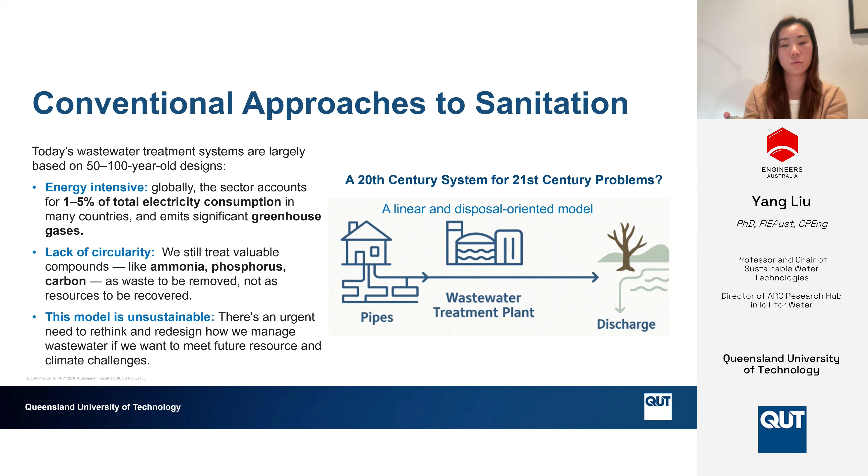I will now pass it over to David. Thank you, Yang, and welcome everyone, and thank you for the opportunity.

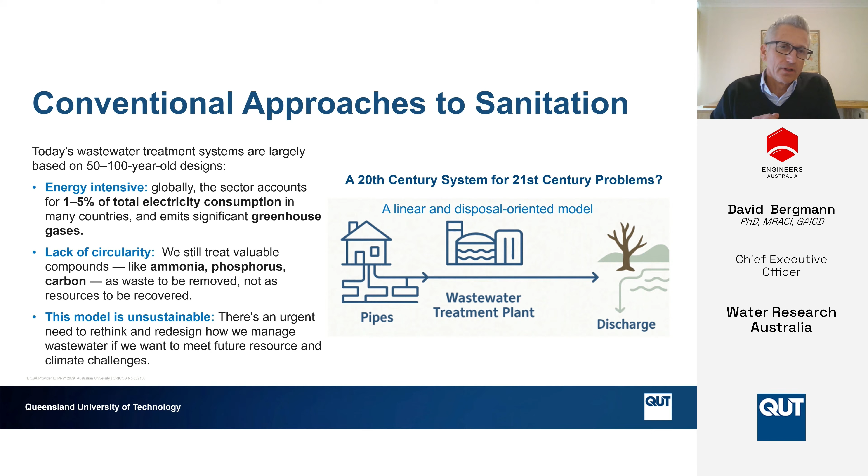In understanding really where we need to go in terms of developing sustainable water futures and systems, it's important we take the opportunity to just zoom out a little bit and look at some of the key drivers and trends happening in the water industry. And potentially those listening in might see these as being pretty common to their industries as well if they're outside the water sector. So there's really three key trends, and we could debate if there's more as well, or whether these are exactly the right ones.

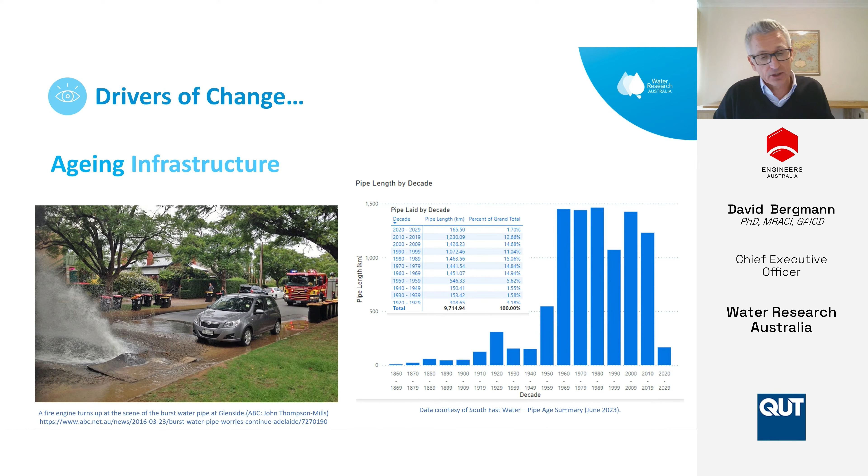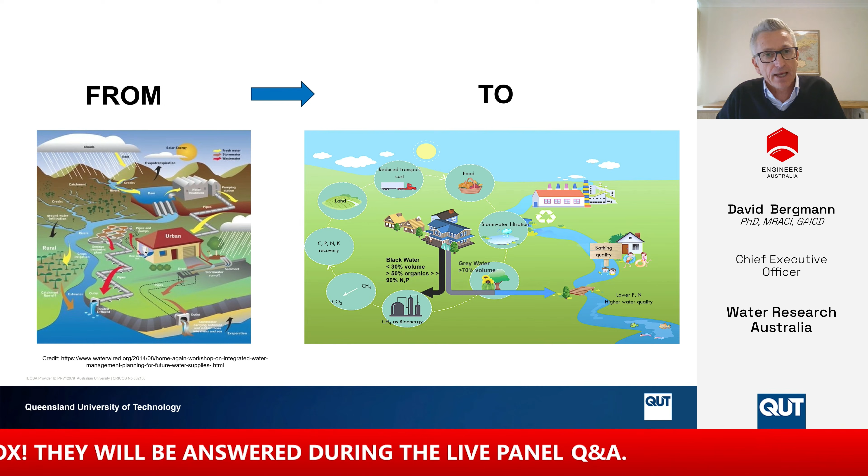So part of what we're presenting today is how a water utility needs to shift from this quite linear progression—from catchment through to pipes and pumps, distribution, treatment, and ultimately outfall, a very linear sequence—to one that is much more sustainable, one that is more circular, one that taps into and recovers resources, one that is more energy efficient, lower emissions, and just more adaptive and resilient to the community, the environment, and the climate we are in. And we'll progressively unpack that.

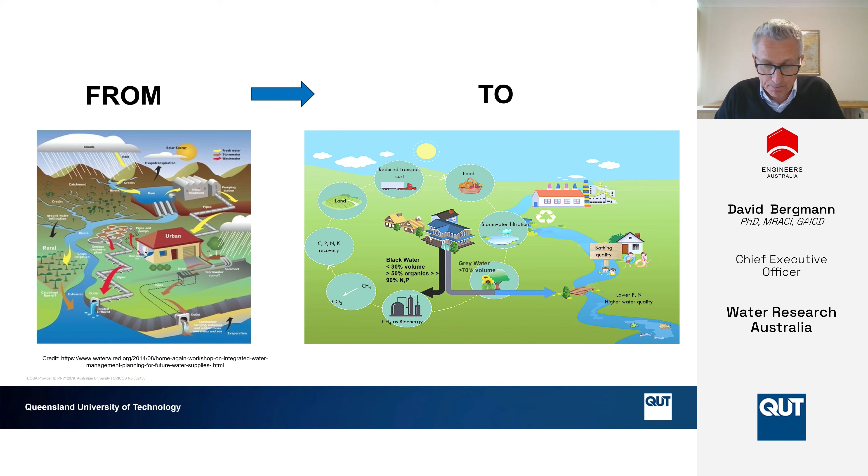What does the future water utility, a sustainable water utility, look like? And this is where I pass back to you, Yang.

There are many ways to think about sustainable wastewater management. So David and I have summarized our journey towards sustainability into three key elements that we believe are essential. The first is around low carbon—focusing on cutting emissions and designing systems that use less energy and even produce energy. The second is around circularity.

That's when we start to shift how we think about wastewater, looking at how we can recover useful resources like water, nutrients, materials, and energy from wastewater. The third element is around making our system more adaptive—building systems that can handle climate impacts and meet the needs of different communities. So we'll follow these three elements to guide our discussion on what rethinking wastewater management could look like for our water industry.

Because we'll be talking about how we might improve our current wastewater treatment systems, we thought it would be helpful to first give a quick overview of our conventional sewage treatment systems.

So basically, we have 4 key processes. The treatment starts with solid removal in primary settling, followed by the activated sludge process as the second step, where microorganisms use oxygen for organics and nutrient removal. Then we have secondary settling for removal of remaining solids. The sludge can then be managed in the 4th step with a process like anaerobic digestion, where we can recover some energy. But not all wastewater treatment plants have an anaerobic digestion process.

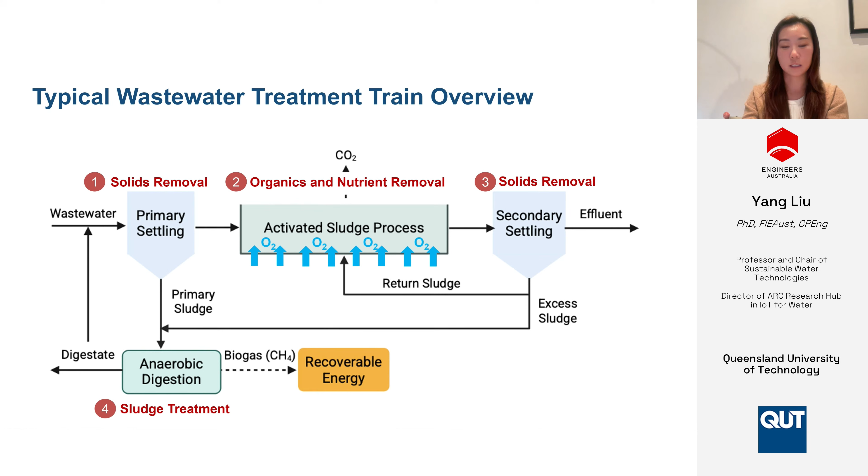So we'll start with the first pillar. Back to you, David.

As we take our transition down the journey to be a sustainable water system in a low carbon future, let's look first at the emissions coming from our wastewater system. It's important we look at those scope 1 emissions first, those we can hopefully monitor, control and mitigate as part of a wastewater treatment process. Those emissions can be significant. It's important that we have good monitoring in place, that we understand the emission hot spots from treatment processes, and then put those strategies in place.

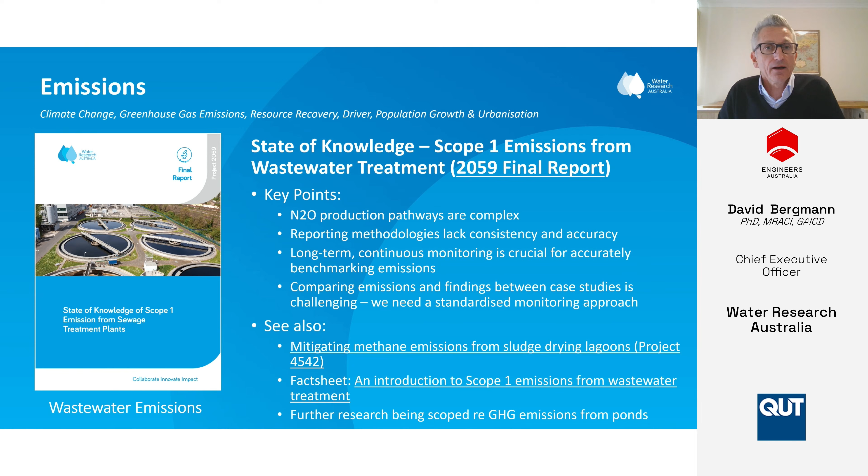For example, nitrous oxide emissions are significant and are often underreported or underrepresented within emissions factors or emissions modelling. There's research emerging in this space. Nitrous oxide is a greenhouse gas 300 times more potent than traditional greenhouse gases, and is of concern, something we need to be monitoring and tracking carefully, which leads to a particular global project that is underway.

Wastewater emissions from treatment plants are a global issue, found across the globe. So there's a global project focusing on making sure we monitor nitrous oxide emissions across the plant, so we know exactly where those emissions have come from. We establish best practice in this space so we're able to compare, share, and build knowledge. Ultimately, the mitigation actions we put in place are going to make a difference and help us meet our climate change and net zero goals.

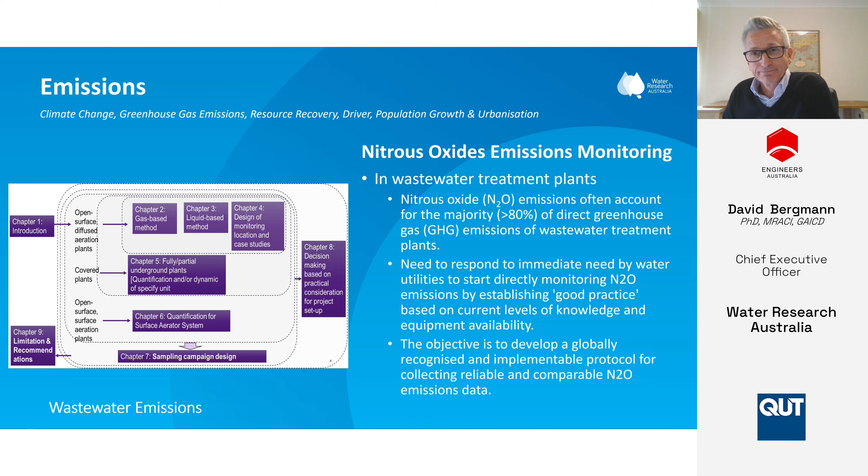However, organics are also a potential energy source, and we can actually design our system to capture them. But in terms of ammonia, currently there are still challenges to directly recover ammonia from mainstream wastewater. So we should really consider how we can reduce energy demand for ammonia removal.

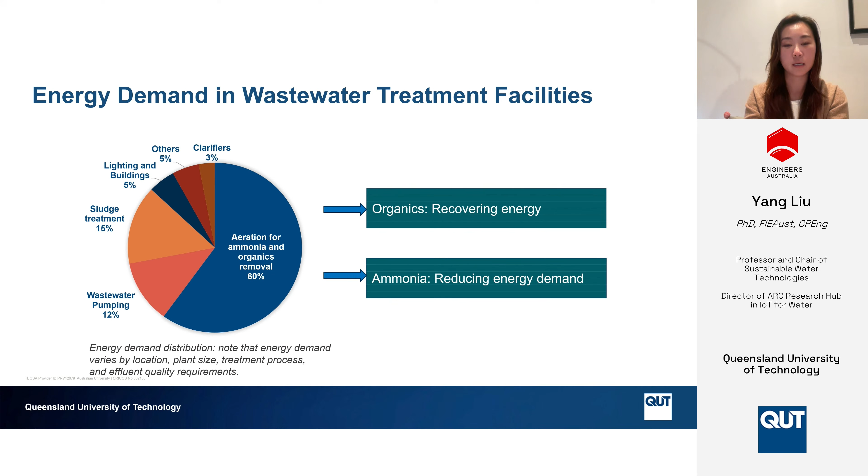At the sewage treatment plant, ammonia is normally removed through a process called nitrification-denitrification. This process begins with ammonia being oxidized to nitrite and then to nitrate, and in the final stage, nitrate is converted to nitrogen gas. This process involves three main groups of microorganisms: ammonia oxidizing bacteria (AOB), nitrite oxidizing bacteria (NOB), and denitrifying bacteria that carry out the rest of the reduction reaction.

Normally, NOB would outgrow AOB, and therefore, as soon as step one, ammonia oxidation, is carried out, nitrite can then be quickly converted to nitrate. The first step consumes around 75% of the total oxygen demand, and the second step consumes about 25% of oxygen. The nitrate reduction process does not require oxygen.

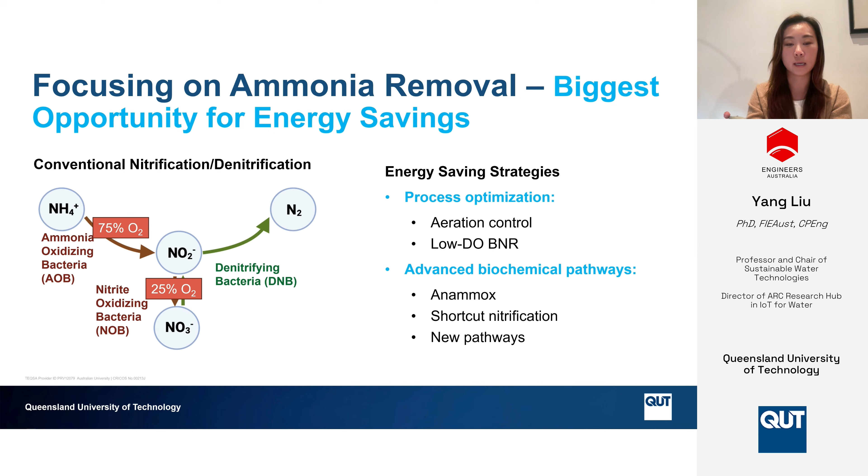So there are two key opportunities for us to consider to reduce energy consumption for ammonia removal. One is the direct optimization of the treatment process, and the second is around manipulating the reactor microbiome community and developing a more energy efficient biodegradation pathway for ammonia removal.

As an example, started in 2010, we conducted a 3-year study at a full-scale sewage treatment plant. Our objective was to explore how we can optimize the treatment process and save aeration energy. We conducted sampling at 9 locations throughout the biological treatment process, following the flow path: first anoxic tank, anaerobic tank, second anoxic tank, and then 3 aerobic tanks. We sampled at the beginning and end of each tank, and monitored the removal of COD, ammonia, phosphorus, metal, and other pollutants, as well as the microbial community dynamics across different seasonal and flow conditions.

We observed, for instance, during low flow or summer conditions, COD and ammonia can both be fully removed after the first aeration zone. This indicates that under these conditions, we can reduce aeration in the aeration tank. So in our study, we largely focused on when and where aeration can be safely reduced without compromising microbial activities, stability, and treatment performance.

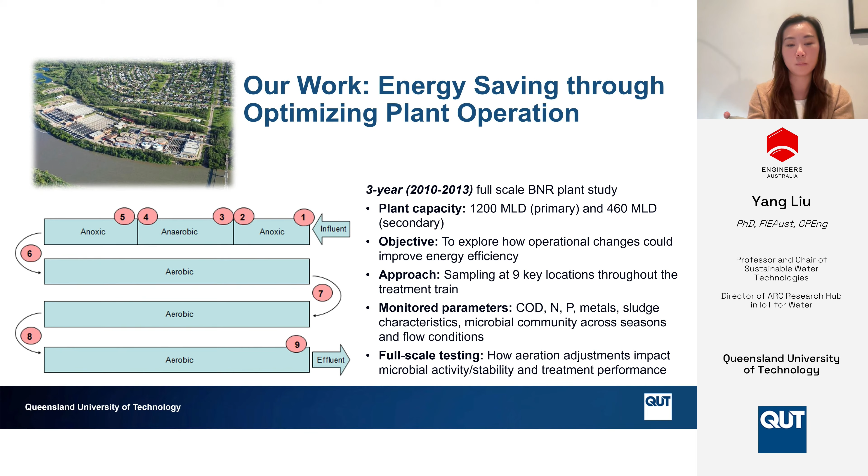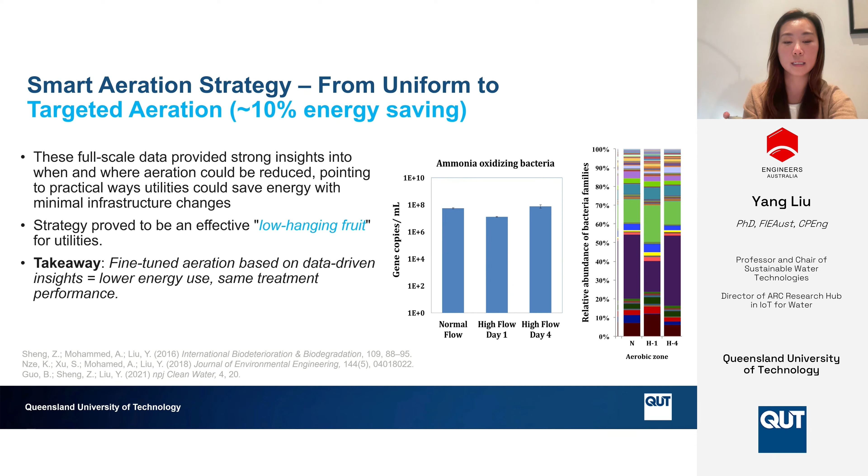So with this study, we were able to develop this targeted aeration strategy, which has led to an average energy saving of around 10%. And this is exactly the type of low-hanging fruit we should be looking for.

But if we want to further improve the energy efficiency for ammonia removal, we'll need to rethink the microbiology itself. If we look at the conventional nitrification-denitrification process for ammonia removal, what if we can inhibit the growth of NOB, the nitrite oxidizing bacteria? That means nitrite produced by AOB in the first step can be directly utilized by denitrifiers and converted to nitrogen gas. This process is called shortcut nitrification, and it can save up to 25% of oxygen demand.

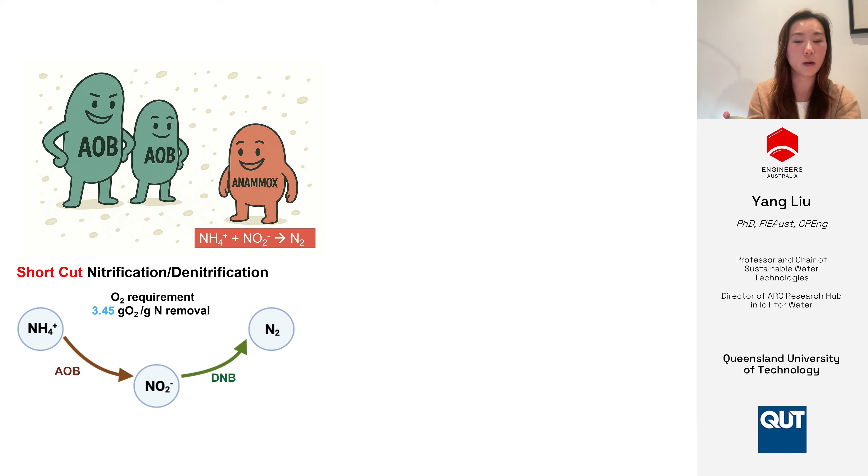Now, if we can introduce a new group of microorganisms called anammox bacteria, which are capable of converting ammonia and nitrite directly into nitrogen gas without oxygen, we can save even more energy. This process is called partial nitrification and anammox, or PNA.

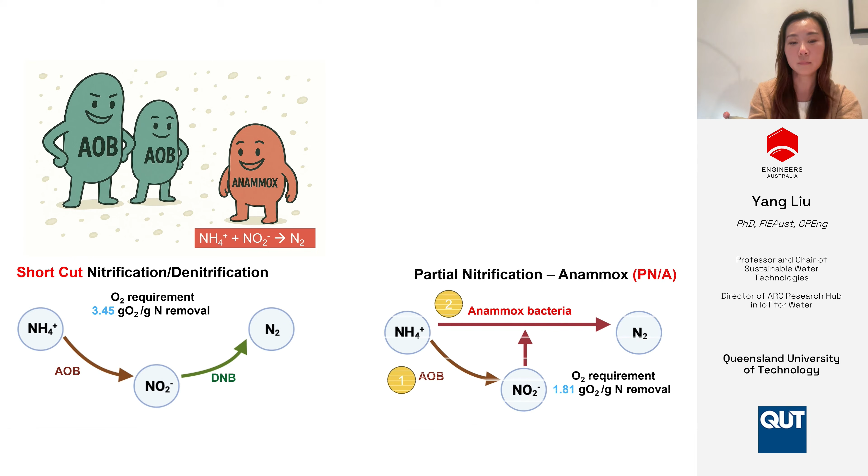In this pathway, about half of ammonia is first oxidized to nitrite using oxygen, and then the rest of the ammonia is removed with nitrite by anammox bacteria. A variation of this process is called PDA, which can achieve a similar outcome. Overall, with PNA and PDA processes, we can achieve about 50 to 60% reduction in oxygen demand.

Therefore, by selecting and encouraging the right microbial consortia, especially AOB and anammox bacteria, in the reactor, we can significantly reduce aeration energy. But the question is how we can actually achieve that.

For instance, in their growth strategy, AOB like more dynamic and changing environments, while NOB prefer more stable conditions. Their oxygen requirements, stress tolerance, preferred pH range, and sensitivity to inhibitors like free ammonia are all very different. This type of difference gives us an ecological lever we can use to select the target microbial community.

The next step is, of course, to apply this knowledge in practice. This slide shows some of the bioreactors we operate in our water innovation lab at QUT. We call it the WISE Lab.

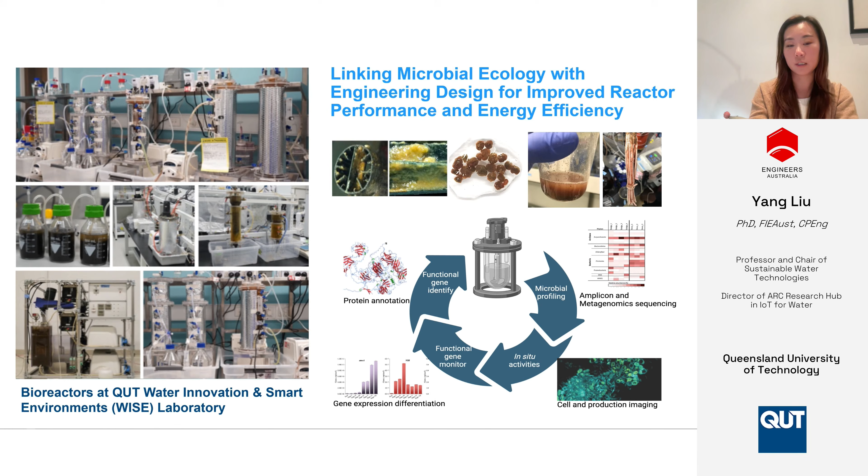In order to select the desired microbial consortia, we often run multiple bioreactors in parallel, each with slightly different conditions like dissolved oxygen levels, aeration cycle, or feeding strategies. Then we compare the microbial community and their activities that develop in each system. The goal is to link microbial behavior and ecology to engineering design and control strategies. This approach can help us develop more targeted, energy efficient, and robust treatment solutions.

One process we developed in our lab is called the granular sludge reactor, or GSR technology. This is based on the shortcut nitrification process. The GSR process is designed to treat high ammonia wastewater and can achieve up to 5 times higher nitrogen loading capacity compared to conventional systems.

We have already demonstrated this process for the treatment of a range of high ammonia wastewater types, including centrate, landfill leachate wastewaters, and other industry wastewaters.

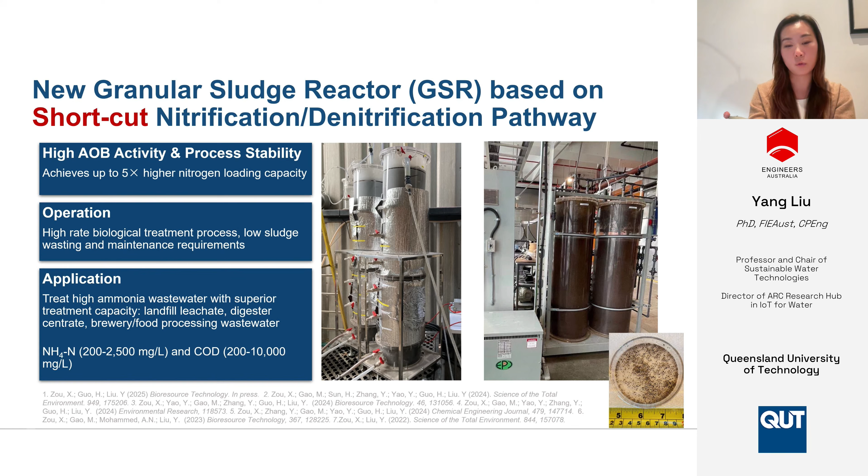In our lab, we've also been working on other nitrogen removal pathways. One process I'm showing here is called Sulfammox, which is sulfate-dependent ammonia oxidation. This pathway directly couples the oxidation of ammonia with sulfate reduction, producing nitrogen gas. Sulfammox also often coexists with other processes like anaerobic heterotrophic sulfate reduction and sulfur-based autotrophic denitrification.

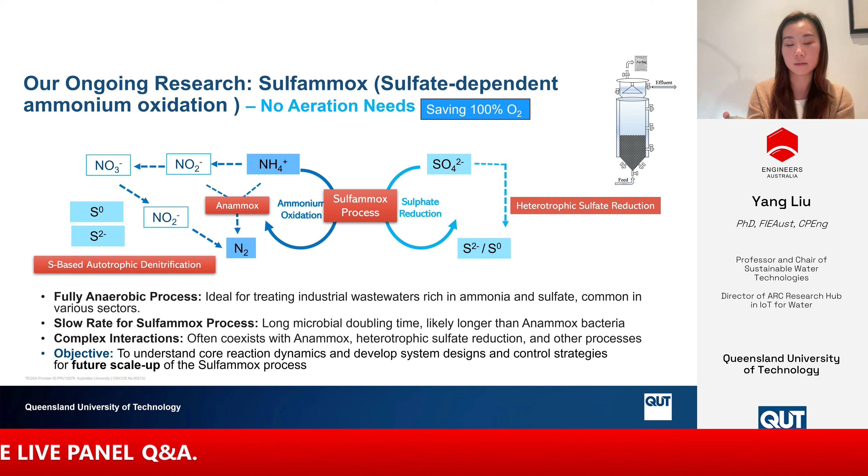This process doesn't really require any energy, so we're saving about 100% of oxygen. But the major challenge is that these are very slow-growing microorganisms, and the reaction is very slow. So in my lab, our focus has been on optimizing the system, with the ultimate goal of scaling up this process for practical use.

So now I would hand over to David to continue the discussion on resource recovery.

Thank you, Yang. As we continue our journey towards a sustainable wastewater future, the second element we've outlined is for the water sector, water utilities, to be more circular in their approach, particularly focusing on resource recovery. There are 4 elements to that we'll move through here.

As it applies to wastewater, what can be recovered? There are nutrients to be had, there are other materials to be recovered, there's the water itself, obviously, to be taken, and then there's the energy, and we'll move through those. The first 2 I will focus on next will be around the nutrients to recover and also the carbon side of it, or other material elements to it.

A water utility or wastewater system needs to move away from thinking of itself as a linear operation, wastewater in, treated product out for disposal. It needs to see itself participating in a circular economy, almost like layers of an onion. It can be a small circular economy focused on part of a plant, or the whole plant, or even one outside its boundaries, associated with the industry around us.

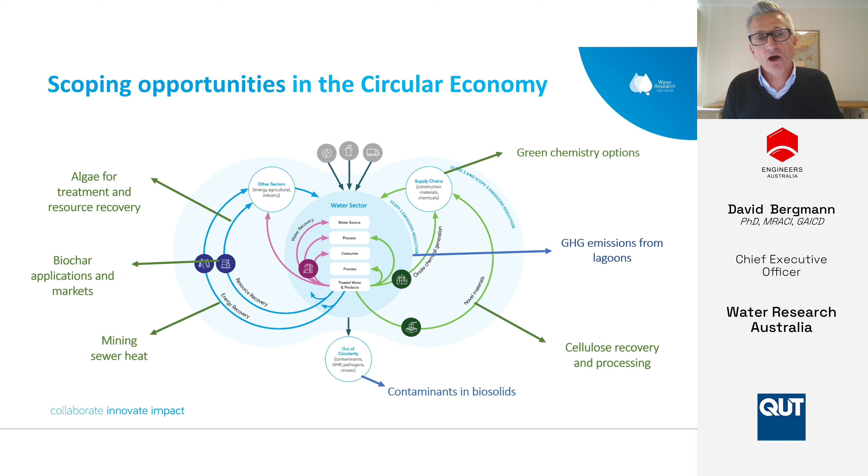We'll unpack a few of these, particularly around what green chemistry transformations are possible for the resources recovered. We'll touch on cellulose recovery and its transformations and possibilities. We'll talk about the sludge or biosolids collected at the end of a wastewater process and the kind of carbon products that can be used. We'll also briefly touch on algae and some other options.

Here's another possible configuration of a wastewater treatment plant, slightly more complicated than the one shown earlier, but there are ways we need to look and break down the process. What can be recovered at the beginning of a wastewater process? For example, there's emerging technology showing that cellulose is recoverable from wastewater treatment, predominantly from the toilet paper used in our sewage system.

Also focusing on that digester stage, there are materials that can be produced that feed and create proteins that could end up as possible feedstocks, volatile fatty acids that could be created to produce other chemicals and bioplastics, for example. Or we could optimize and harvest the biogas and biomethane coming from that, or focus on the carbon and the type of carbon products.

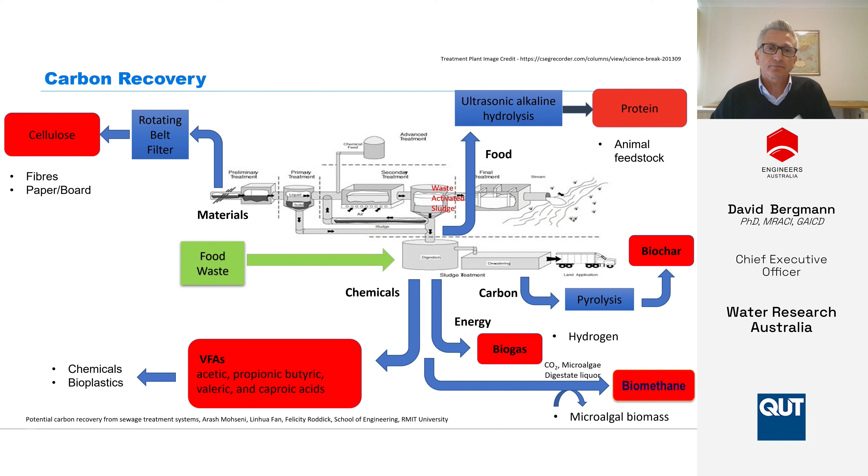Plus there's the opportunity to participate in that wider circular economy by looking at what other food wastes or organic wastes can be brought into a treatment process, to feed it effectively and create more value out of these pathways we're establishing here. So we'll look at a few more of these.

Firstly, that solid product that remains at the end of a treatment process, some call it sludge or biosolids at various levels of dryness. Traditionally, a wastewater operator may have arranged with agriculture or nearby farmlands to distribute it to land, and it has great carbon, nutrient, nitrogen, phosphorus value, and is very effective.

These days, with the number of emerging contaminants coming through in our wastewater systems, just think PFAS as one example, that's becoming an increasingly unviable option for sending to land. So the industry is really looking at thermal processes to convert these biosolids, rich in carbon, nitrogen, phosphorus and other things, into materials of value, carbon materials of value.

Pyrolysis is getting a lot of consideration at the moment in Australia and other parts of the world. That's the kind of thermal process, using different levels of temperature to favour a carbon type output at the end of the day.

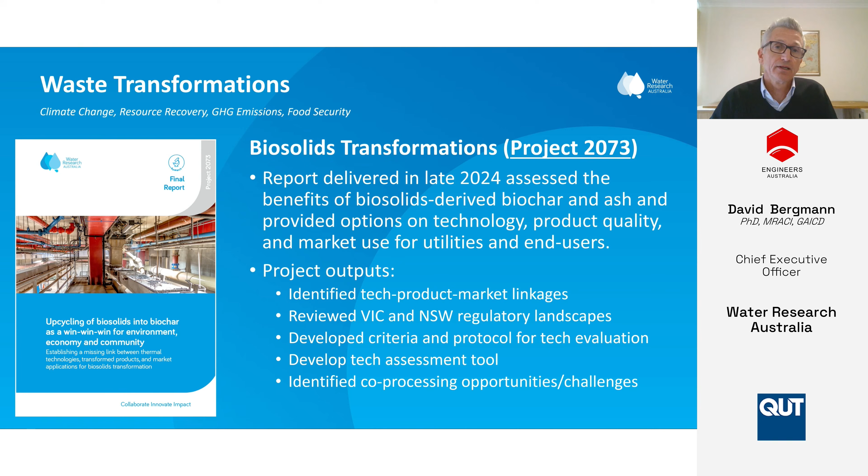Carbon is being used in a whole bunch of areas: batteries, electronics, purification, even water and air purification as well. I'll come back to some other pathways and possible products from these processes.

I just wanted to touch on the principles of green chemistry, particularly as I'll talk about cellulose in a second. Cellulose is an interesting feedstock that lends itself to these kinds of transformations to produce other chemicals, platform chemicals, bioplastics for example. It's been established for some time now, the 12 principles of green chemistry, of which I'm not going to go through all of them.

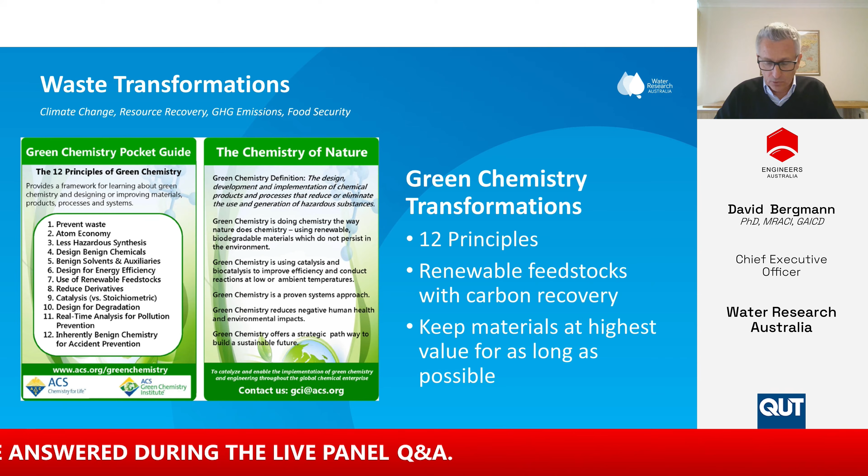But the water sector has a great opportunity to design and really consider what they do, in particular taking the endless source of carbon feedstocks coming through the wastewater system, and other elements as well that are possible there, and taking the opportunity to, rather than just destroy or dispose, actually try to keep some of these materials at their highest possible value and convert them into other materials of value, and really look at the way green chemistry can help in those processes.

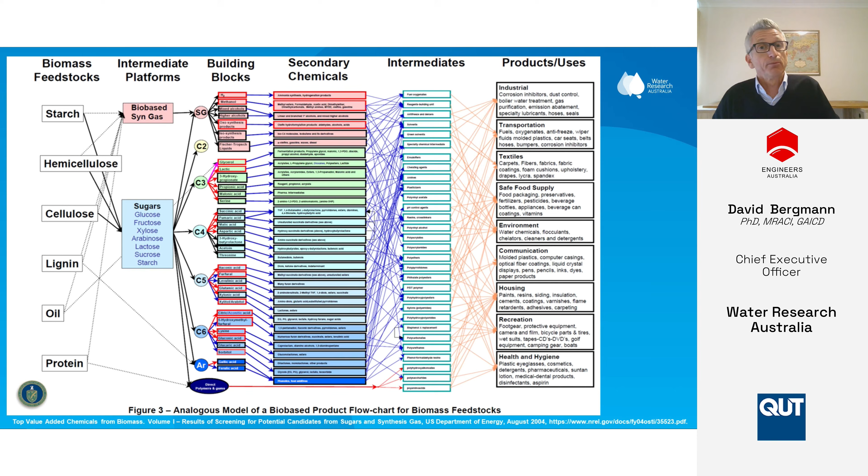There's been a lot of thinking done on this already, we don't need to reinvent the wheel here. So if we're able to isolate, for example, cellulose or other materials out of our wastewater systems, there's an enormous number of possible pathways to convert these materials into other materials of value, reducing our reliance on non-renewable or petroleum-based feedstocks, and actually replace those for a much more sustainable future.

So let me briefly touch on cellulose. The technology is emerging for us to recover cellulose from the front of wastewater treatment plants. That cellulose can either be used directly in other products, so roadways or other construction, for example, or even derivatized in other packaging materials to produce much more sustainable packaging as an outcome.

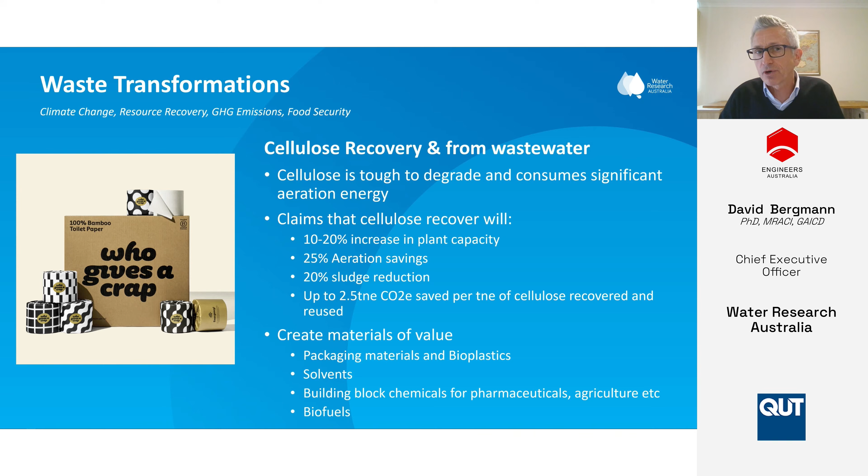Also, by removing that cellulose, there's research and reports emerging that it has the potential to increase capacity of our wastewater plants, reduce their energy demand and carbon emissions as a result, and lead to much more efficient processes, aeration savings, sludge reductions. So what do you do with that volume as well? It's an emerging field with much more research potential, and a lot more renewable or green chemistry outcomes possible.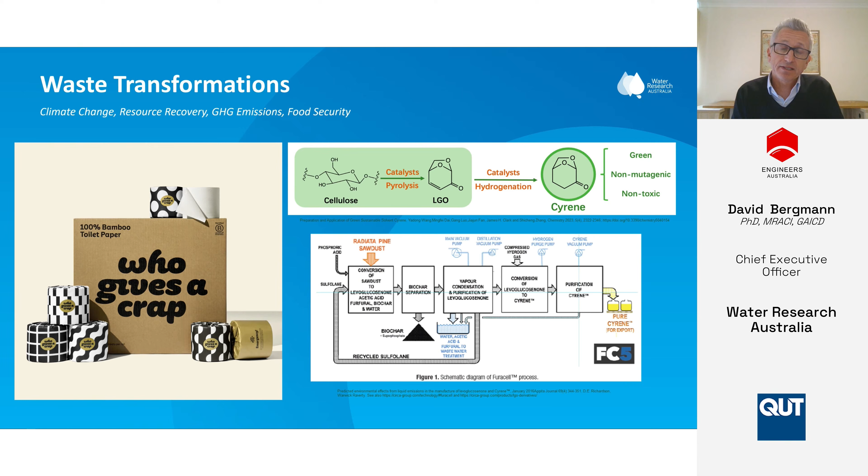I said I'd come back to other outcomes other than carbon, in terms of other thermal transformation processes to be applied to sludge or biosolids. In this case, it doesn't require the product to be dried as much, which is an energy saving in itself. By using pressure, lower temperatures are required, using supercritical properties of water under pressure to become an excellent solvent, and favour a process that is more towards biomethane, and also products that are low carbon with inorganic nutrients to potentially lead to pathways for agriculture.

So it just represents an alternative pathway from carbon to a carbon product like biochar, to biomethane and nutrients, depending on the context, the situation, or the economics of the particular water treatment plant and their pathway to a more sustainable future.

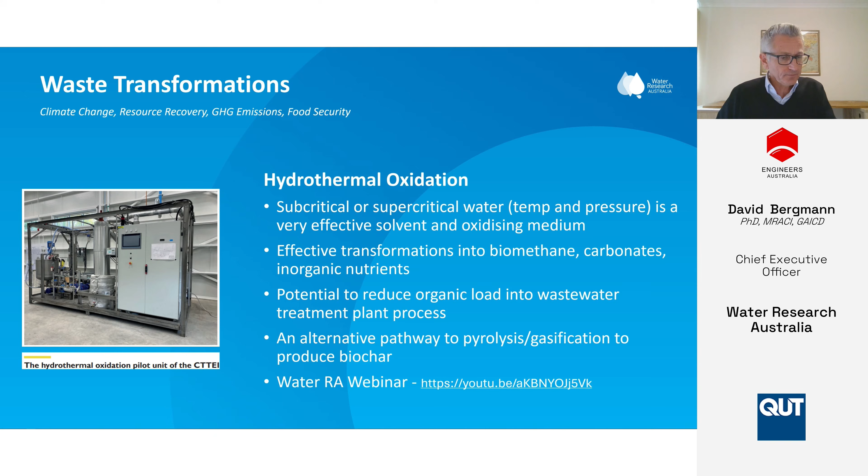Algae is also an emerging field, where algae, in particular macroalgae, is proving to have a number of benefits. Algae is great because it's a photosynthetic process - it's using natural energy from the sunlight, consuming CO2, producing oxygen, drawing down that CO2 and carbon to produce a biomass which can then be further transformed into other things. It's also taking up nutrients to produce a much cleaner water system, with opportunities for what can be done with those nutrients, the biomass, and other potential green chemistry transformations that are possible.

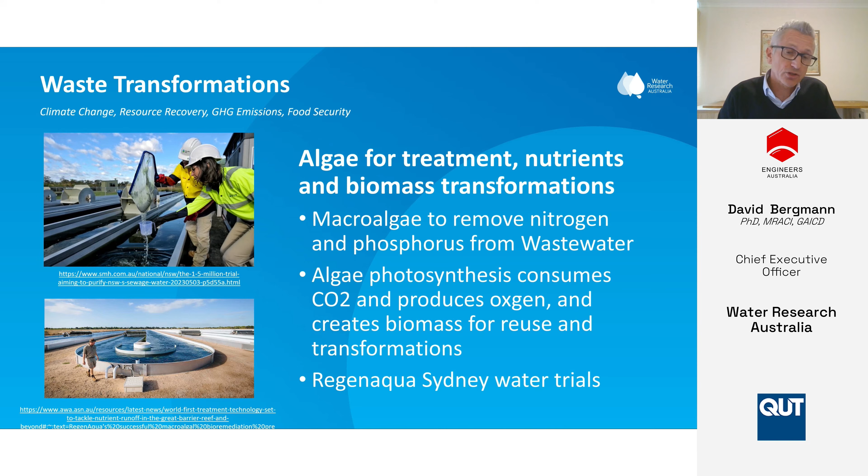Having said that, there are some warnings in some of these transformations to more sustainable solutions. We still need - and there is a lot of research going on, but more to be done - to understand the fate and outcomes of a lot of the contaminants that might be present. Thinking PFAS is one example, heavy metals, pharmaceuticals and cosmetics, making sure these are being dealt with properly, so that as we pass them on in the circular economy, we're not passing problems further into the food chain or the environment.

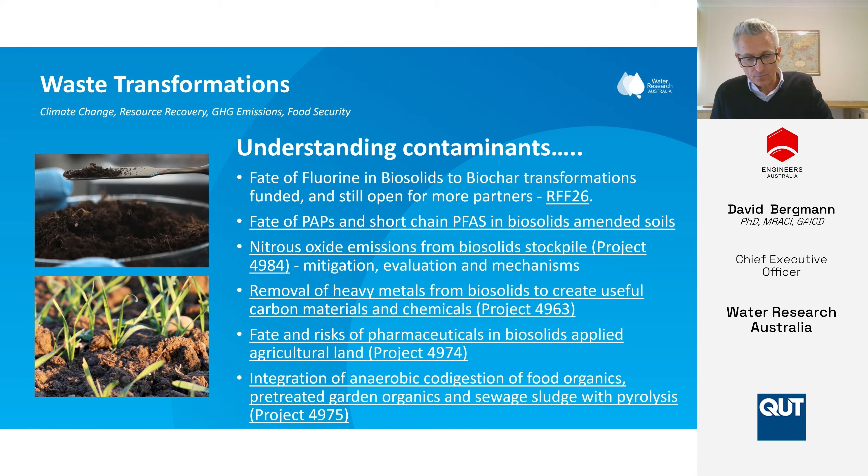Also, we should be considering the origins of the wastewater and our opportunities to actually recover nutrients and resources of value at the beginning of the process, not just be focused on our treatment plants and what can be done there. So here's an example of an innovation and technology being developed by UTS, Southeast Water, and other partners.

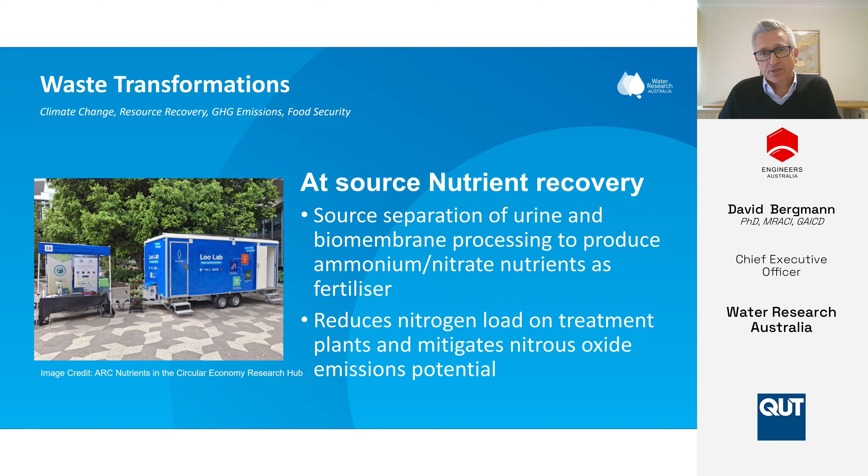We're using a urine diverting toilet. They have created a mobile public toilet, which they plan to use to test the technology and also test community and customer acceptance of this kind of circular economy, where the urine is taken using biomembrane technology and converted into a liquid fertilizer. As a result, there is less nitrogen entering the wastewater system and hitting our treatment plants, leading to less aeration needs, more efficient processes, and of course helping mitigate the potential for nitrous oxide emissions.

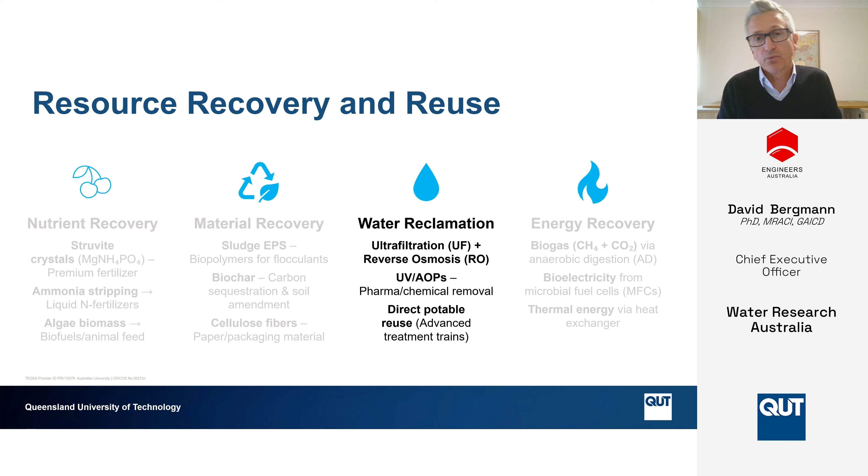So we'll keep moving on in our journey of resource recovery, and we're going to look at one of the more important parts and why we are here in many ways: looking at water reclamation and reuse. It's been a very focused topic, but it's very important that we look to save every last drop in our world of climate change, water scarcity, and water security.

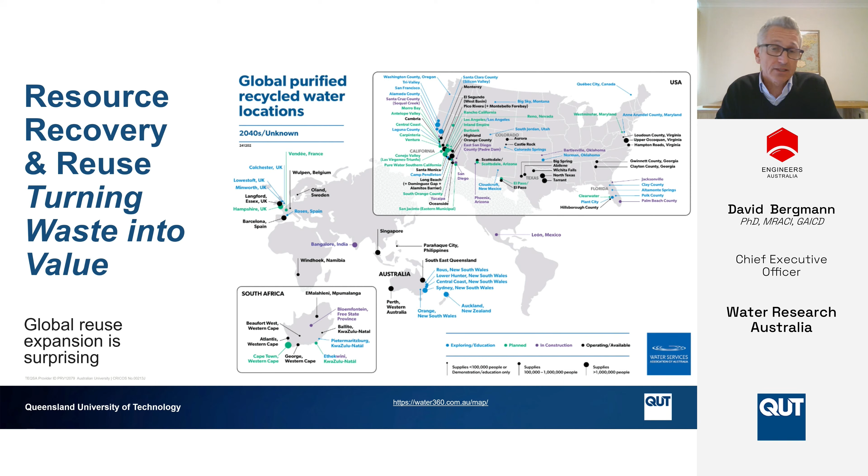So there's good reason for us to do it. In Australia, our sources of water are currently very rainfall dependent. We're surface water dependent, and by that we mean water that's in our catchments, in our lakes, and in our rivers. And of course, in times of drought and low rainfall, we are very susceptible to that, and it's also our most climate susceptible source of water.

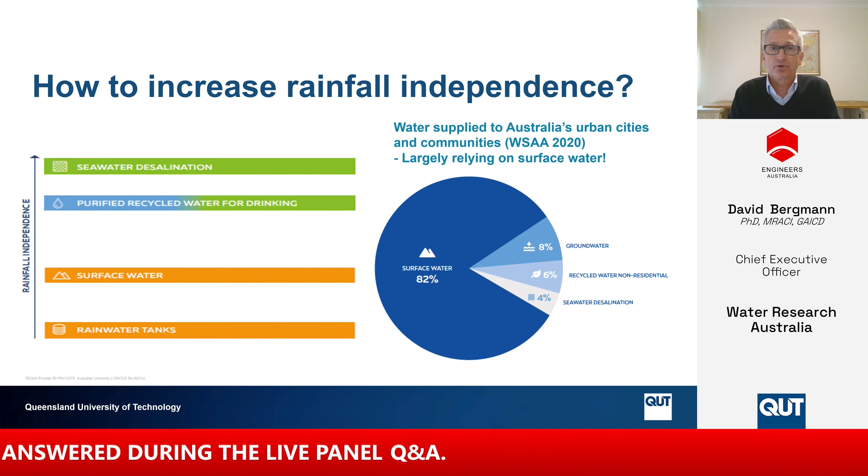So we really do need to be looking at all options of water that are possible for us, which is exactly the name of the title that WSAA put together: All Options on the Table, a report back in 2020. The numbers may have moved slightly since then, but I think the message is still there, that surface water, in terms of the yield or what's available to us, does have its limits.

Particularly in terms of dry years, climate impacted years, that can be a problem. So looking further at the other possible solutions, such as desalination to the far left, or recycled wastewater, these provide us much larger sources or yields of water as sources of supply for a much more secure and sustainable water supply in Australia.

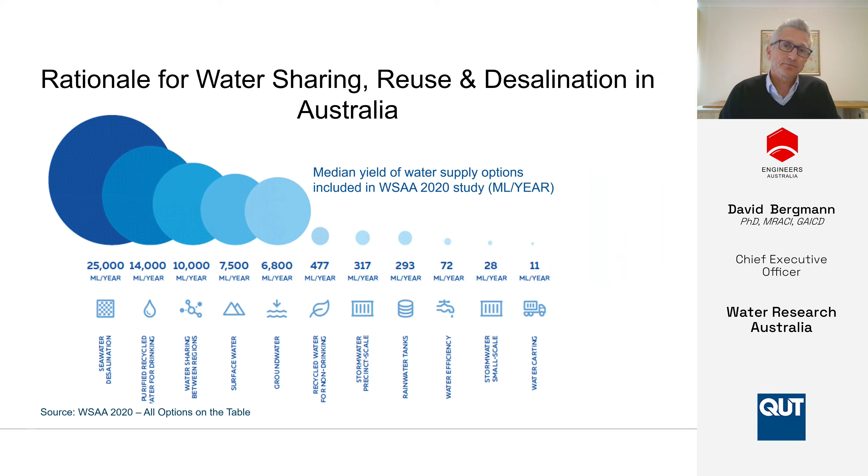As part of that report, they also looked at expected costs for those kinds of solutions. And yes, recycled water and desalinated water is more expensive than current practices. But in a climate changing world, in extreme events, in years of water scarcity, you begin to bring in some of those costs on the far right-hand side of things if we haven't planned in advance, around how we use our recycled water, how we're recovering water from our wastewater and using desalination to keep our water supplies high, then suddenly we find ourselves in a very costly scenario.

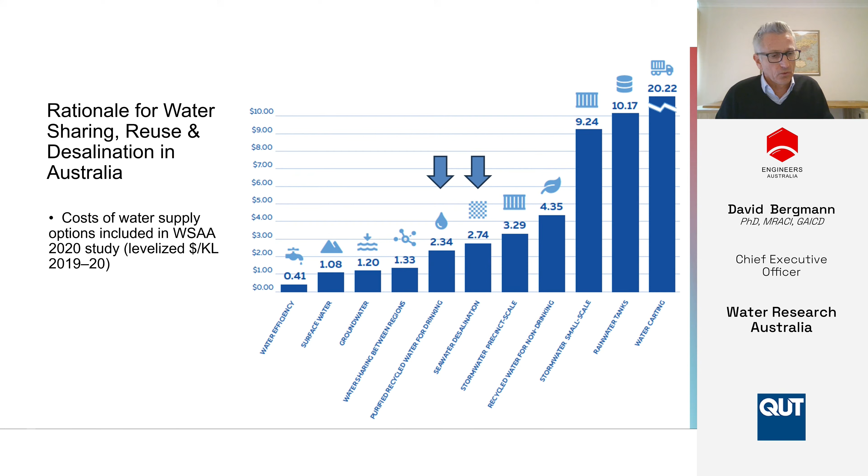So the time is right now that we are adopting these wastewater recovery practices, water reuse and reclamation, now to secure our supplies and be a much more sustainable water system and water utilities.

A couple of things to support that are going on in the industry and are needed in this space. In order to recover wastewater and reuse it, it's important - and it's surprising this doesn't exist - there are no standard protocols for validating the treatment plants and treatment processes associated with this. So we are working together with global partners to establish these standardized treatment protocols so that water treatment operators can claim all the possible log reductions and chemical contaminant removal steps that are possible. That leads to more efficient operations that are cheaper to run, cheaper to design, cheaper to build, saving significant costs and meaning much more efficient operations by having validated treatment processes.

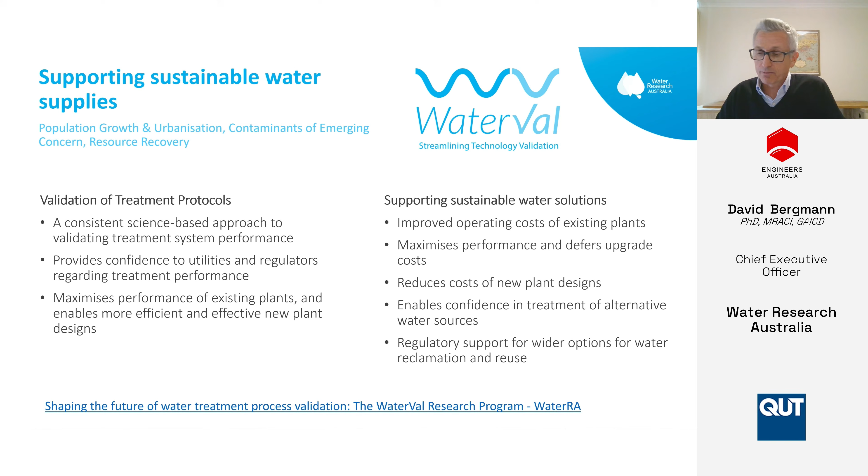Also, to building our resilience to drought, by using highly treated recycled water to keep our catchments and our dams at very high levels. If we look back at learnings and research from the Millennium Drought, environmental flows were cut to make sure that our cities had enough water in them, which in the hierarchy of needs was important. But I think there's a learning there that our environment was permanently damaged in some places as a result of that.

The rainfall runoff relationships that existed pre-millennium drought no longer exist. So it's important that next time we experience these times of extreme water deficiencies, we are able to look after the environment as well and be more sustainable long-term.

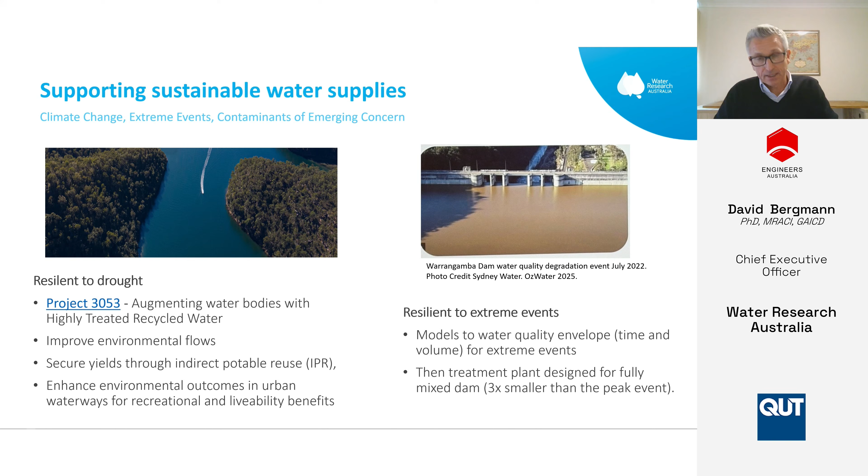Also, if we are to use more sources of water, it's important that we understand - and we are studying this - the source of these waters, monitoring them more closely and more efficiently, and then controlling them. This is where we're looking to make the most of some protocols established in North America to better understand the sources of this wastewater and how we can treat it more efficiently and effectively.

Also, it's important in wastewater treatment processes that disinfection and advanced oxidation processes happen to remove particularly carbon-based contaminants. But as we continue studying this, it's important that we don't also produce harmful disinfection byproducts as a result, and get the right treatment processes - advanced oxidation processes - to be both efficient and safe.

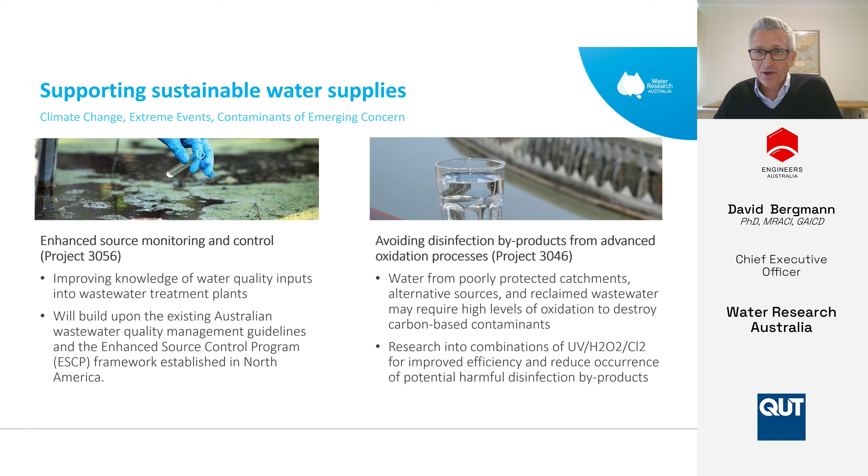So now this is where I pass back to Yang. Over to you. Thank you, David.

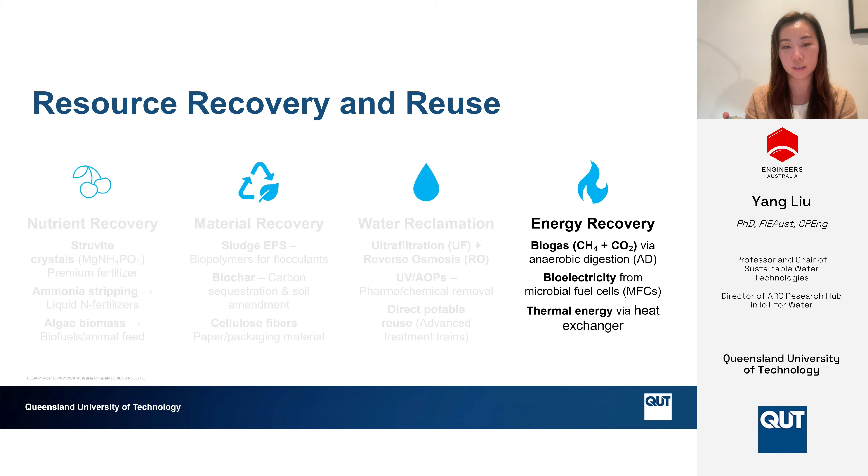Continuing on the topic of resource recovery, there are quite a few different opportunities to consider for recovering energy from wastewater. I'll focus mainly on biogas recovery, one of the most mature and scalable methods currently available. Biogas recovery is primarily linked to organic matter in wastewater. In conventional sewage treatment, organics are removed using the activated sludge process, which requires large amounts of oxygen to convert organics to CO2 - a net energy consuming process. Alternatively, we can design a process like anaerobic digestion, which converts organics into biogas. This biogas can then be used to generate electricity and heat, and this process does not need oxygen.

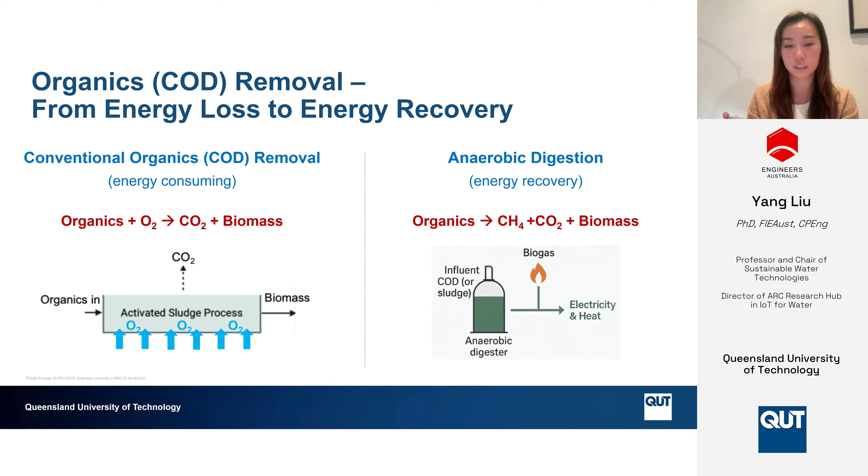Let's take a closer look at how organics are typically managed in a conventional sewage treatment plant. One point to mention is that in the wastewater field, we typically use COD, or chemical oxygen demand, as a measure for organic matter in wastewater. So we start with 100% of COD in the raw influent. Of this, about 10% typically remains in the treated effluent, meaning it cannot be removed. With primary settling, we can remove about 40% of the COD captured as primary sludge, and another 20% ends up as secondary sludge. That leaves about 30% of the COD being oxidized to CO2, and removal of this 30% requires significant energy input for aeration.

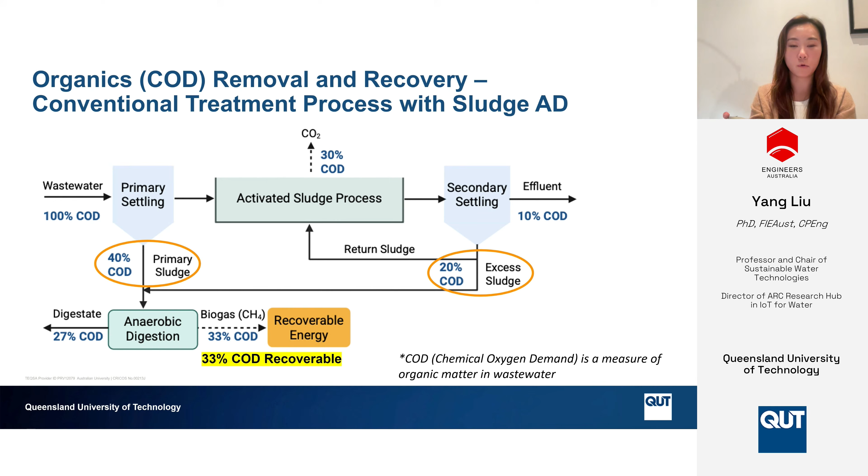In a sewage treatment plant with an anaerobic digestion process, we can recover around 33% of the COD from the sludge as biogas, which can then be used to generate heat and electricity. What we see here is that the more COD we can divert into the sludge, the more energy we can potentially recover through anaerobic digestion.

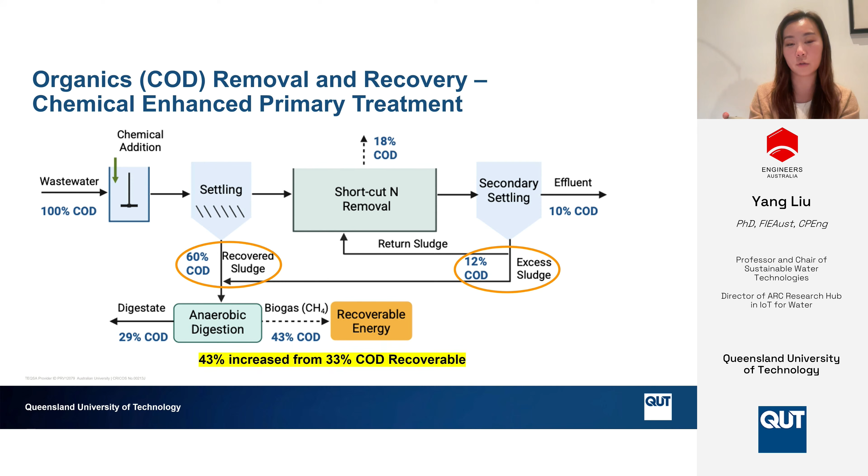Therefore, if we want to capture more COD in the sludge, one approach is to conduct chemically enhanced primary treatment - adding an additional chemical dosing step to improve COD capture in the primary sludge. This way, we can increase COD capture from 40% to 60% in the primary sludge, leaving only 18% of COD requiring aeration for removal. That means we're now able to recover about 43% of the incoming COD as methane - a 10% increase compared to conventional practice. But an even better approach would be to completely redesign our treatment system and directly use mainstream anaerobic treatment for methane recovery.

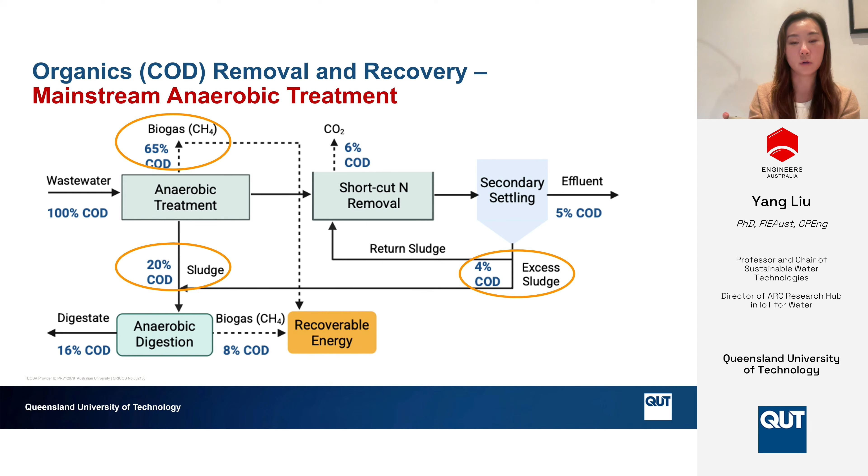That means only 6% of the COD requires aeration for removal, and this will allow us to recover about 73% of COD as biogas. So the benefit of this type of mainstream anaerobic treatment is very clear. These are well-established processes and mature technologies that we can use, with low operation cost, less sludge generated, and they do not really require oxygen.

However, mainstream anaerobic treatment is not very widely adopted in Australia. There are some important practical considerations. From a technical perspective, one concern is that anaerobic treatment can become less stable at lower temperature conditions. Another challenge is the footprint. Conventional anaerobic digestion systems typically require a larger reactor size, and because of the slow methanogenesis process, that requires longer hydraulic retention time.

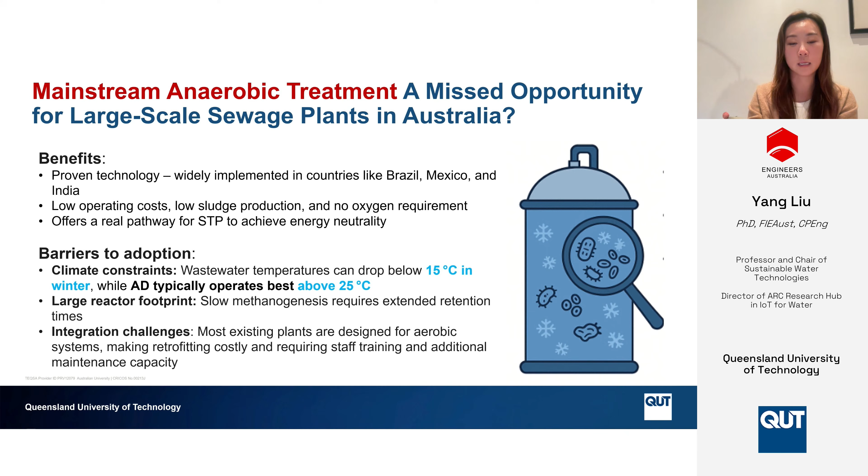There are also other factors. Most existing treatment plants are already designed as aerobic treatment systems, so retrofitting them into an anaerobic process can be costly, and there is limited local operation experience and training available, which can all impact the level of adoption. In past years, my research team has demonstrated successful high-rate anaerobic treatment of municipal wastewater, even under lower temperature conditions than those experienced in Australia.

For instance, in this slide we show a UASB digester system operated at pilot scale in the Netherlands, in collaboration with my Dutch colleagues at Wageningen University. In this setup, low temperature municipal wastewater is first treated in the low temperature UASB reactor, and the sludge from the UASB reactor is then recirculated into a small heated mesophilic digester. With this design, we were able to achieve stable operation with wastewater temperature as low as 10 degrees Celsius, and the hydraulic retention time was only 6 hours.

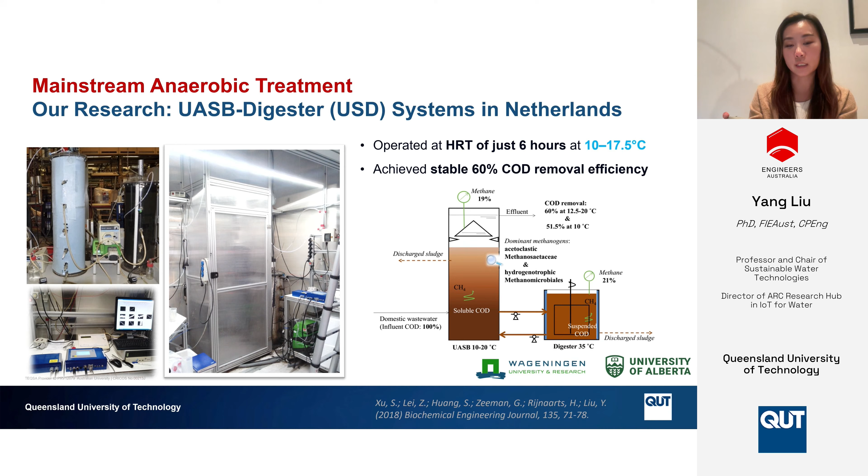We also developed a more simplified system configuration, just a single UASB reactor. These reactors were operated at a full-scale sewage treatment plant in Canada. In this setup, UASB reactors were amended with granular activated carbon, and the reactors were fed with raw municipal sewage with temperatures ranging between 12 and 18 degrees. As we can see in this performance graph, we were able to achieve a short hydraulic retention time of just 8 to 12 hours while maintaining stable COD removal and consistent methane production.

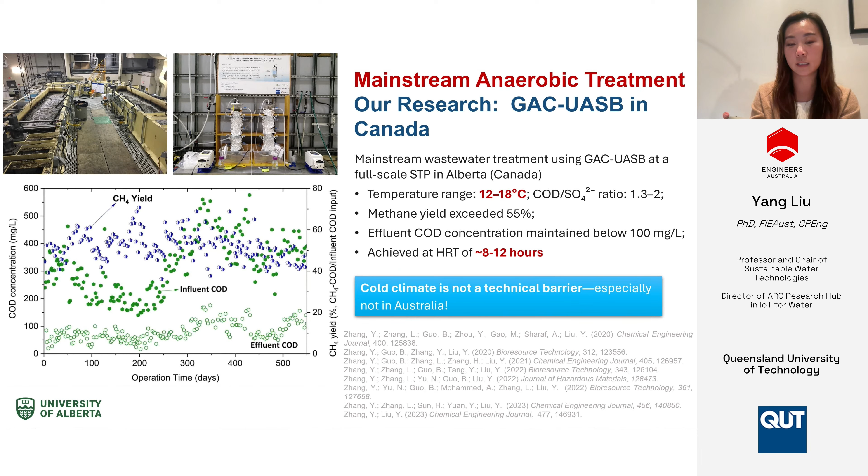In terms of footprint, this type of high-rate anaerobic system can be comparable to conventional aerobic systems. Therefore, the takeaway message here is that low temperature during winter conditions is not a technical barrier, certainly not in Australia. So this approach should be considered as a viable option for future wastewater management.

This brings us to our third pillar: building climate resilience and community value. Let's take a step back and look at the broader infrastructure challenges we're facing. We've been focusing on the treatment facilities - they're critical, but they should not be the only focus for us to discuss.

In the water and wastewater industry, pipes in the ground are our biggest asset. They account for over 80% of the total infrastructure value. In Australia, as in North America, most of these pipes are already at or beyond their design life, and they are extremely difficult and expensive to replace. With the aging water infrastructure, our annual capital expenditure is expected to exceed 9 billion in Australia, and we're still looking at an 80 billion funding gap just to maintain our existing system.

But here's the real issue: it's not just about the aging infrastructure. It's our reliance on centralized buried infrastructure that locks us into this cycle of very costly upgrades and replacement. This is a strategic moment. The question is really, do we want to keep investing in infrastructure we know will fail again in 50 to 70 years' time? Or should we start redesigning our systems to be more flexible and less dependent on long-distance underground pipes?

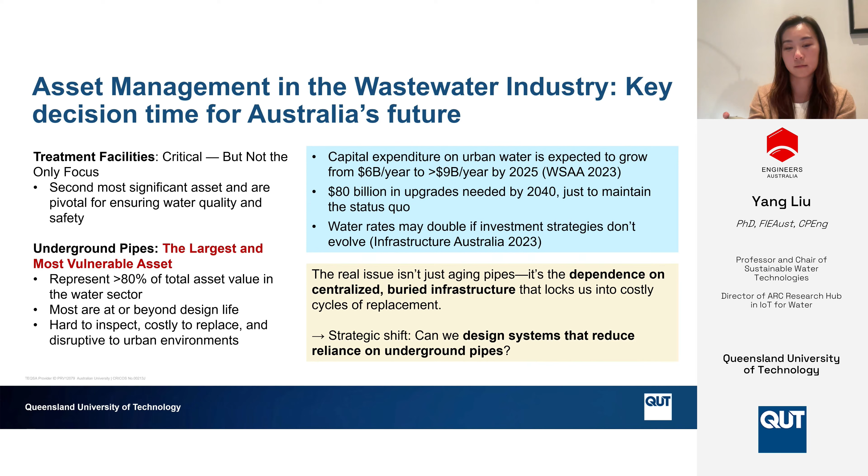So one obvious option is to use a decentralized system. This helps us eliminate long-distance collection systems. It will also allow for localized energy, nutrient, and material recovery and water reuse within the same community. There have been lots of studies on the cost and environmental impacts of centralized and decentralized systems, which have already shown that decentralized treatment systems can offer real advantages.

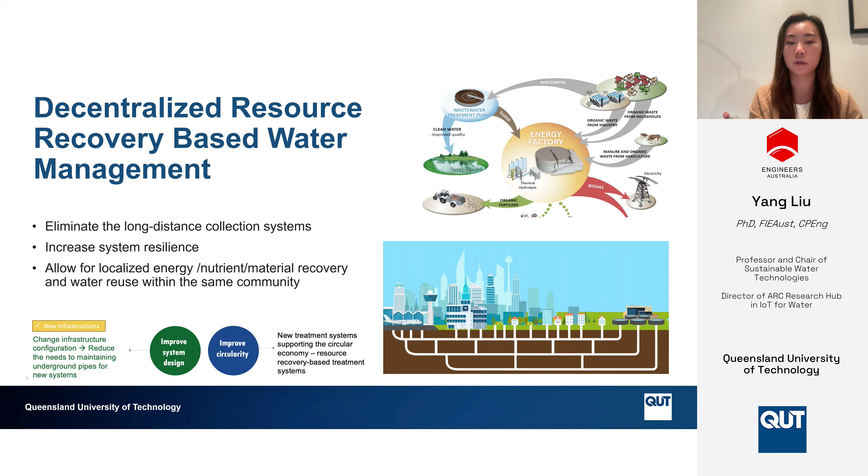Back to you, Dave. So I'll quickly run through a couple of examples of decentralized and resilient solutions that are in progress or have been done.

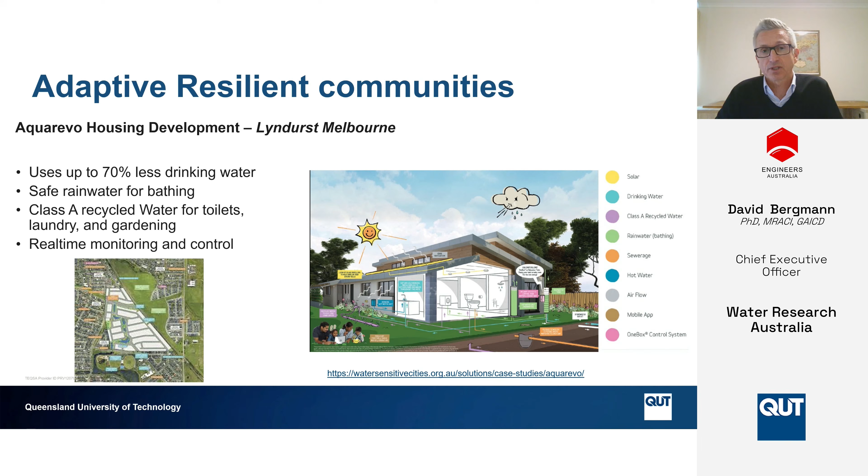One of those, courtesy of Southeast Water in Melbourne, is the Aquarevo housing development, where they have approaching 460 homes that are using up to 70% less drinking water by using rainwater harvested in rainwater tanks, and reusing Class A recycled water from their site for laundry and gardening purposes, all underpinned by real-time monitoring and control to make sure those systems are working well.

Another example is using urban wetlands that have often historically just been there for retention or detention, to actually use these wetlands as treatment systems, decentralized sources of water to be able to supply to their local community.

Together then with the plan to put a small package treatment plant on the end to be able to supply, once again, Class A recycled water into the local homes. Yang, back to you.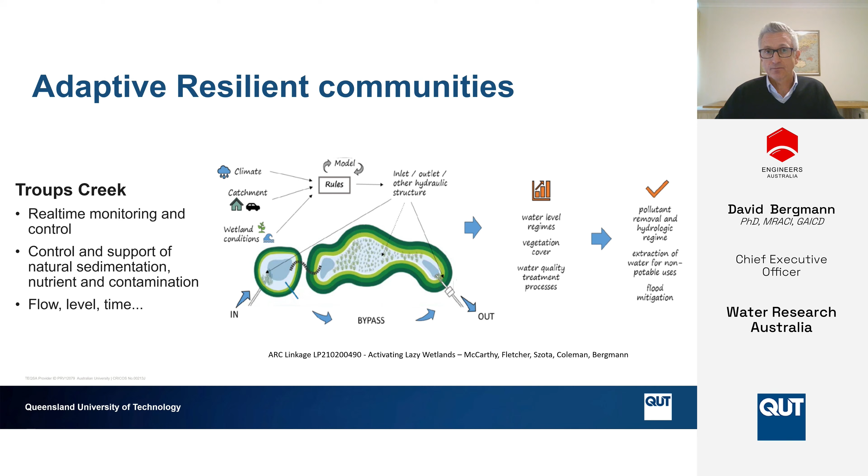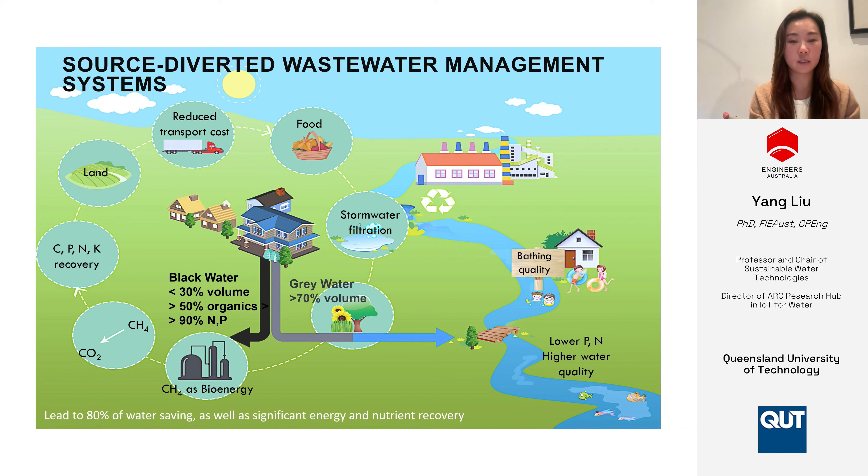Gray water can then be used for heat recovery and can be treated for different water reuse options. This type of source diverted resource recovery system can lead to 80% water saving, as well as significant energy and nutrient recovery. My team has been focusing on developing treatment processes for source-diverted black water and gray water treatment.

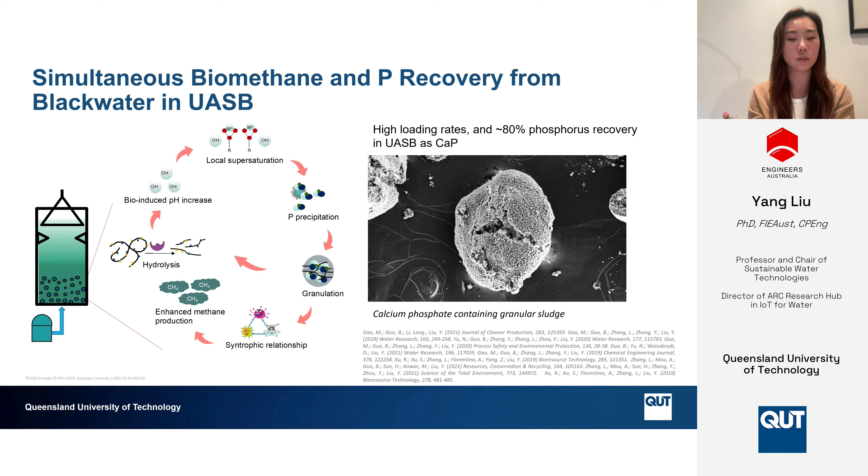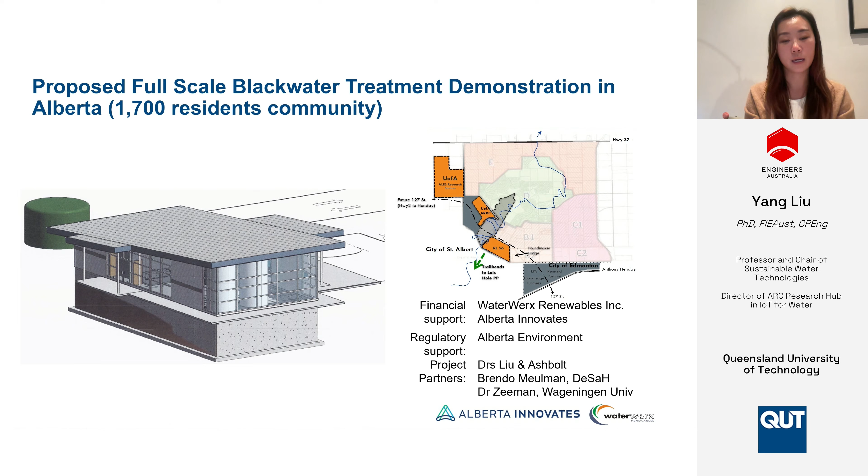We've received financial support for a proposed demonstration of a black water resource recovery system for a community of 1,700 residents in Canada.

For developing this type of decentralized wastewater treatment system, I want to emphasize that technological innovation is very critical, but equally important is community engagement and shared decision-making and trust building.

And with all that, I will again hand over to David.

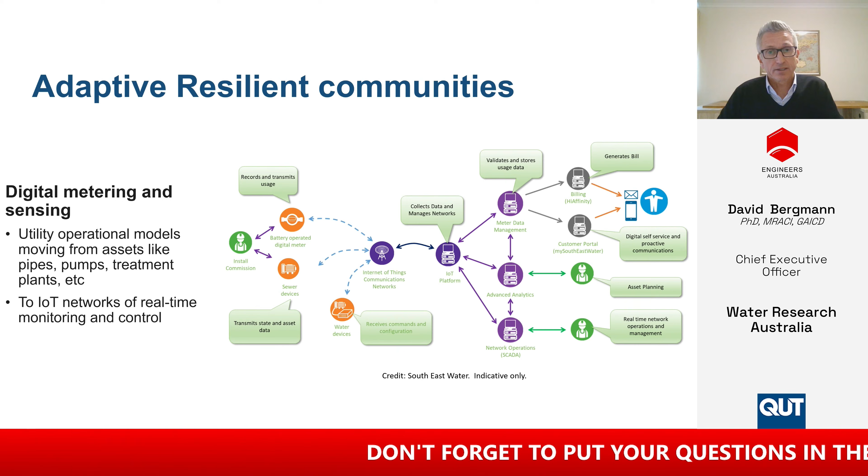One example of how we are continuing to build trust and transparency using digital technology: water utilities are making this move from a linear asset-based utility, from pipes, dams, pumps, structures, to having a digital infrastructure where they're going from sensors and devices at the edge through telco platforms, into their own IoT platforms, data analysis platforms, then integrating into their various customer and operational systems, creating a much more customer accessible, community supporting, much more transparent water utility for their customers.

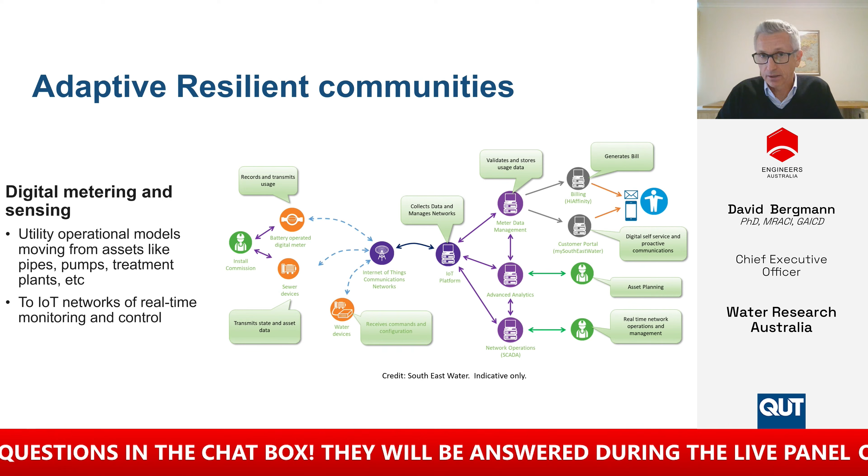One of the examples is how they're embracing digital or smart metering, primarily for water, but also for recycled water. There's more data being collected, half hourly rather than the usual quarterly meter readings, and more analytics on that data to be able to inform customers when they might be experiencing abnormally high levels of usage, potentially leaks, and continuous flows in their homes.

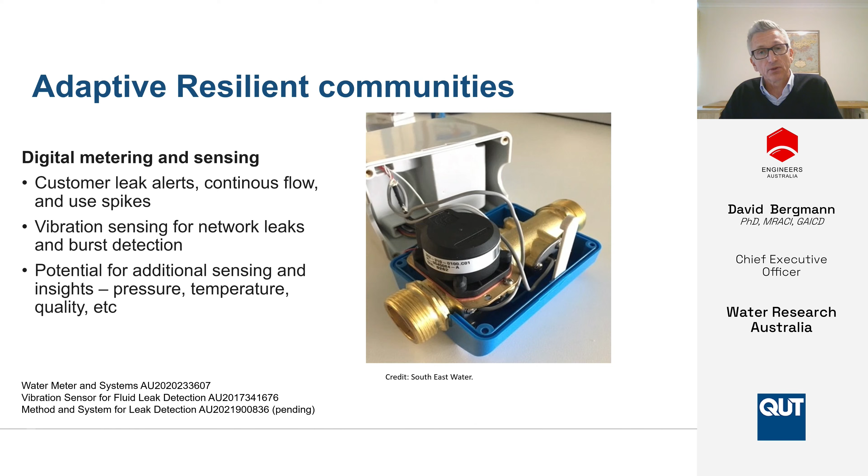This is an example, credit to South East Water, of how they are rolling out the process of digital water meters, supporting their customers to save money, but also saving water and leading to much more resilient communities.

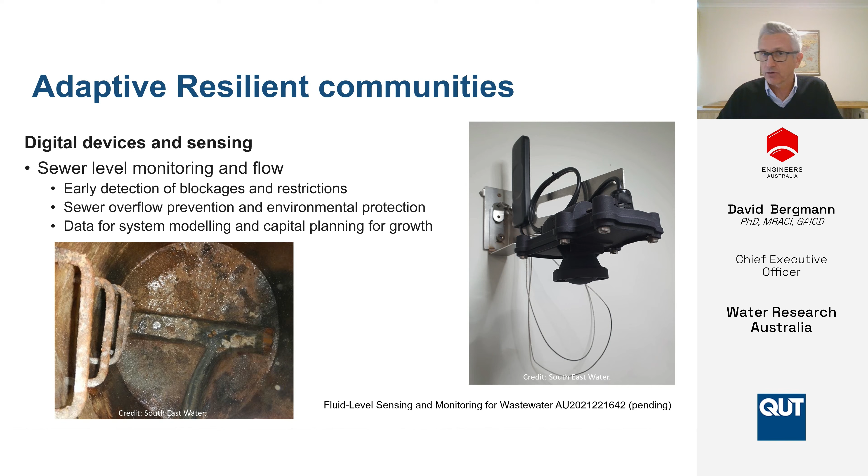Another example of digital technologies enabling more trust of water utilities, again courtesy of South East Water, is sewer monitoring devices that can be placed, because of their low cost, in a large number of manholes, really enabling early detection of even pre-blockages. Those restrictions that might lead into blockages mean the cost for clearing and cleaning is cheaper, certainly much cheaper than the cost of cleaning up a spill, but also brings transparency to communities that they're not spilling into their environment and creating disruption for their environment as well.

Yang, I will hand back to you.

I would like to share a major initiative we're leading at QUT, the IoT for Water Hub. This is a 5-year program jointly funded by the Australian Research Council and over 30 industry partners. We're also in collaboration with researchers from 6 other Australian universities.

Together with our partners, we've developed a shared vision for the hub, which is to build an IoT system for real-time monitoring and control that supports our water future. We aim to achieve this by increasing water source diversity, enhancing environment and ecosystems, and engaging our communities.

Our work is organized around 4 technical areas, including smart and low-cost, low-power sensors, real-time network visibility and decision-making tools, advanced analytics and predictive modeling, and real-time asset monitoring and control. Beyond the technical work, we'll also be addressing other areas like policy, business models, and industry training aspects.

This is to ensure that innovation translates into real-world impact. Over to you, David. And now it's my privilege to wrap it all up and make sure that you've taken something away out of today's presentation.